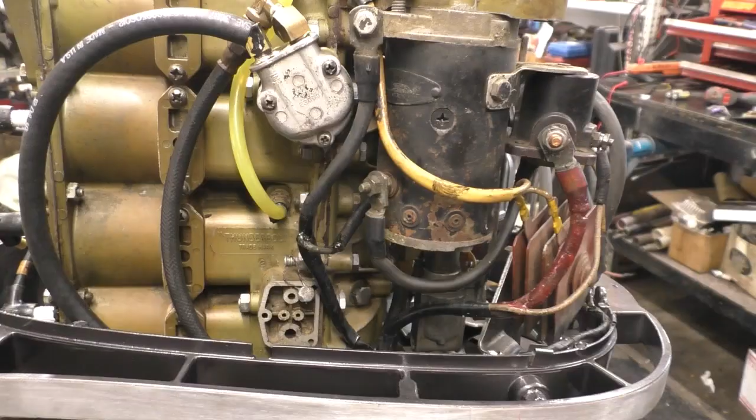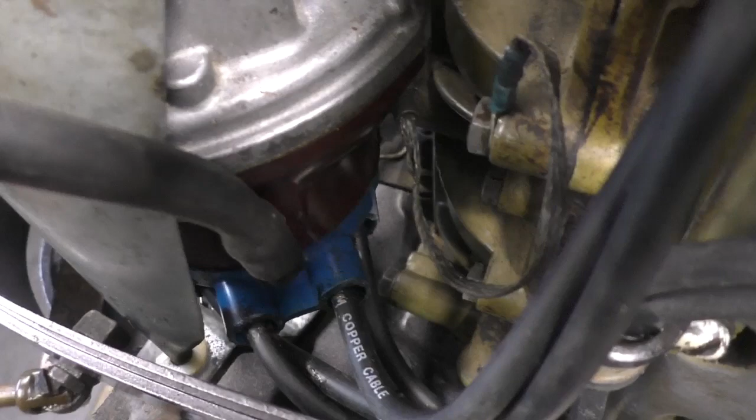Link and sync of an early Mark 55. This Mark 55 is the early series that had the connection on the throttle arm, and you have to adjust the timing last. You have to set the carburetor first, running in the tank with the tachometer and the test wheel. You got to have both.

This has got the choke solenoid, which is not mounted in the top shroud. Those were a little bit different, a little bit easier to set up. These older ones are a little bit more difficult.

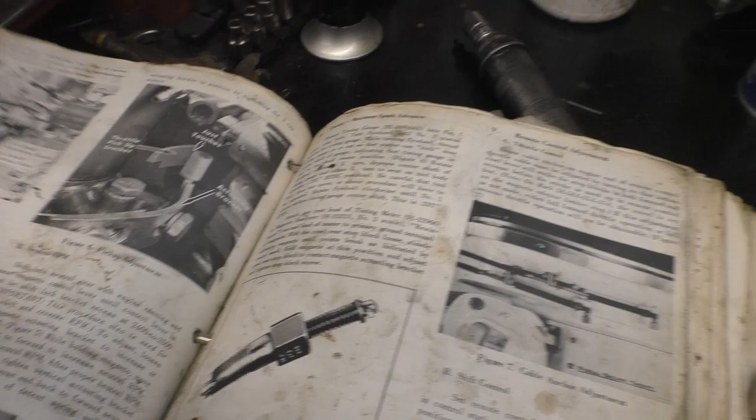This is the section in the book on it, 3 pages. Basically, you set up your magneto with the splines and so forth, and make sure your timing is correct on the flywheel, if you can find the marks.

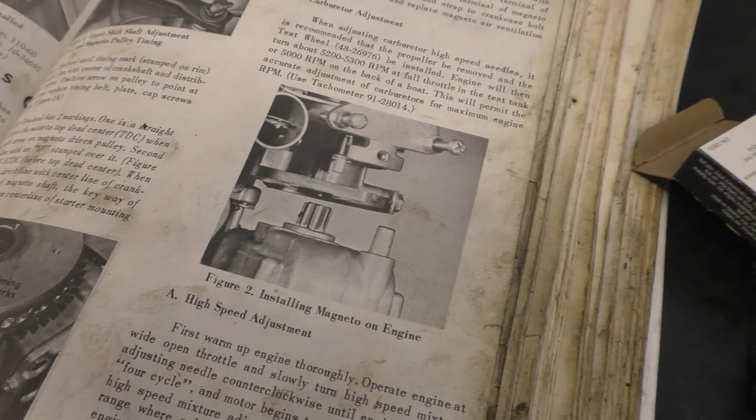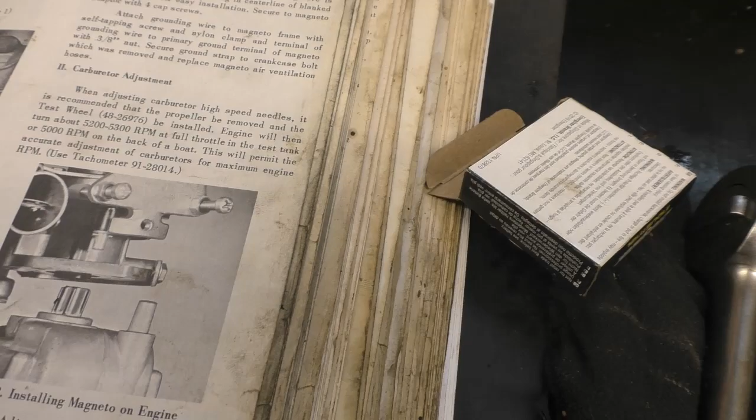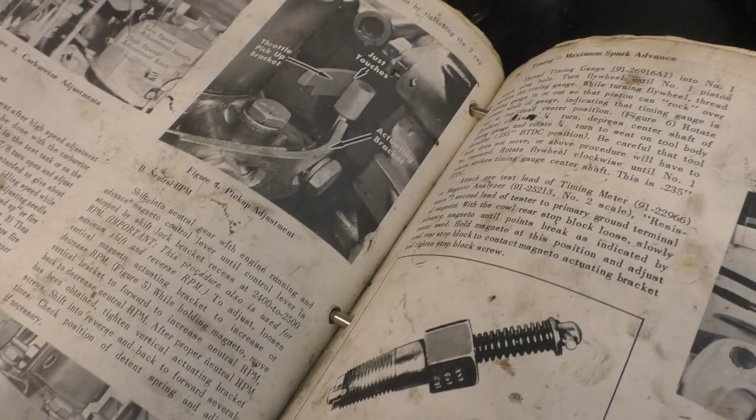The next thing you do is stick the thing in the tank and adjust the high-speed needle, both high-speed needles. Then you go to an idle adjustment, then a linkage adjustment, the pickup, then neutral RPM, and then timing, maximum spark advance.

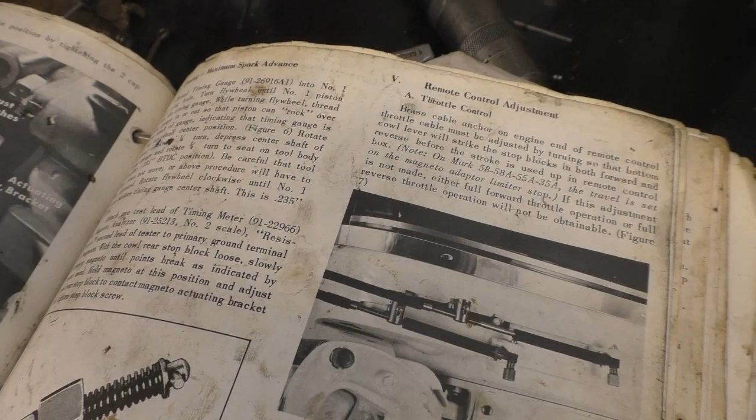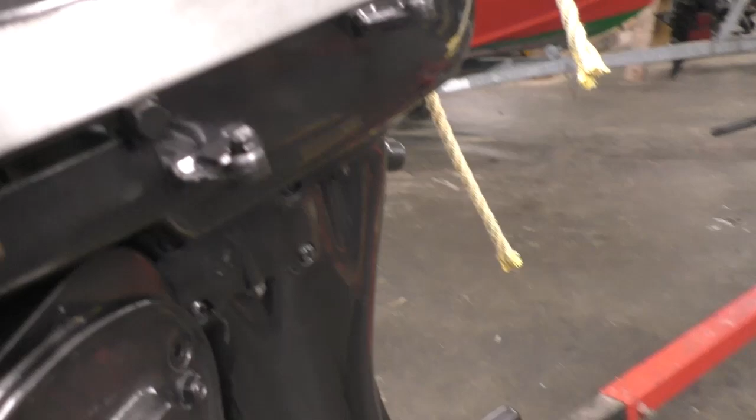So that timing is done after you've done everything else. Then your plate is set. This thing right here is set, and you adjust your maximum spark with these sliding locking things right here.

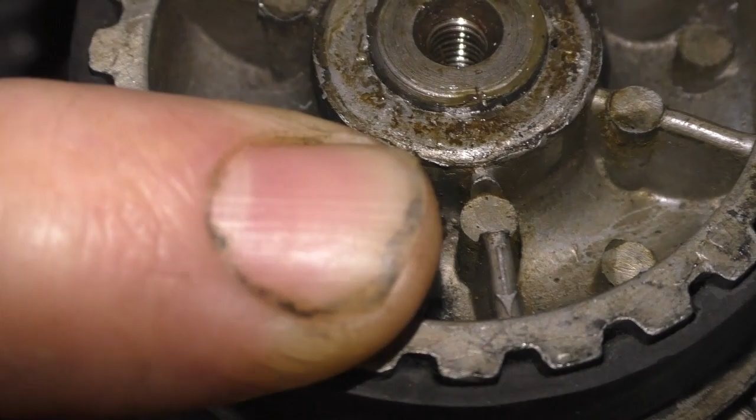Timing the Mark 55. The most important thing is the arrow on the distributor pulley. If you look very carefully, there's a little tiny arrow at the end of my finger, pointing, and we will rotate that.

This is the tachometer that was used to time these things. It's a Merc-O-Tronic, and you need this type of tach to get an accurate RPM on these things, because newer ones are way too sensitive, and the magneto puts out way too much juice. It's very hard to use a tiny tach or whatever, and these seem to work the best.

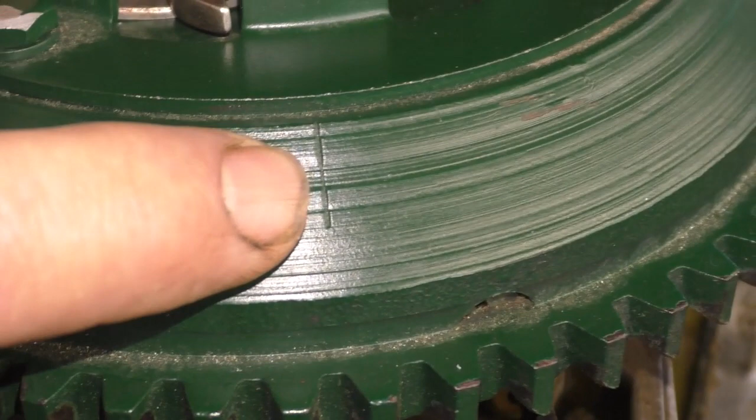The arrow, which we can see right there, is in alignment with the single line. There's another line over here with an O over it—that's the 235 line, and I'll show you how to line that up. But this is the line that aligns the pulley with the arrow, so the pulley is aligned properly with the #1 piston. We're at top dead center, and the magneto is in its proper relationship to that #1 piston.

We're going to be using the Mercury official manual, and Matt here is going to be asking me questions as we go along. The first thing we did on this was to set up the timing belt, so we had the straight line with no zero over it. It lines up with an arrow that's underneath this cover, and you can see it quite plainly.

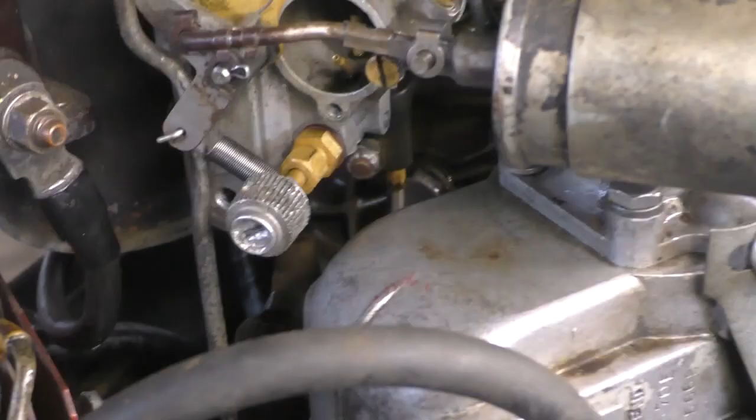The first thing we're going to do is have this running in the tank, and we're going to put a screwdriver in our high-speed adjusting needles. Listen carefully as I do it, and you'll hear the engine fade. When it starts to fade, you've gone past the point of the best fueling at wide open throttle, so we turn it backwards and give it more fuel for about 1/8 to 1/4 of a turn. Same thing with the bottom carburetor.

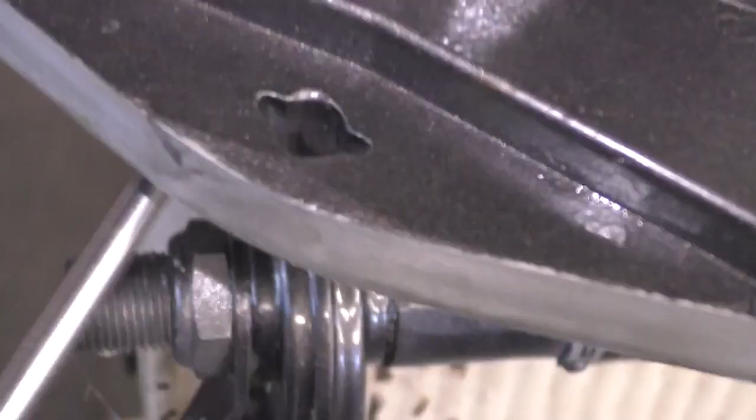You can see the screwdriver in there as well.

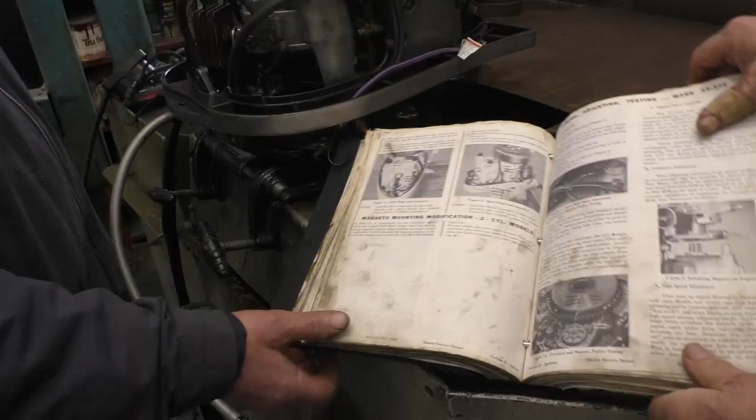Same thing. If you listen while I'm running the engine, that's the first thing we do in our timing procedure of this engine: adjust the high-speed needles. This is to adjust the carburetor high-speed needles.

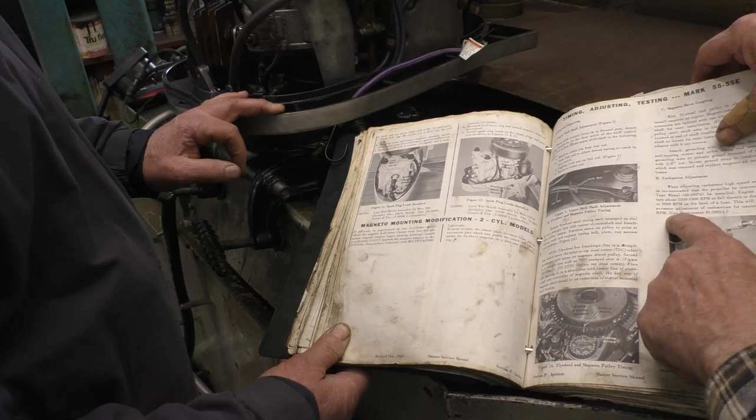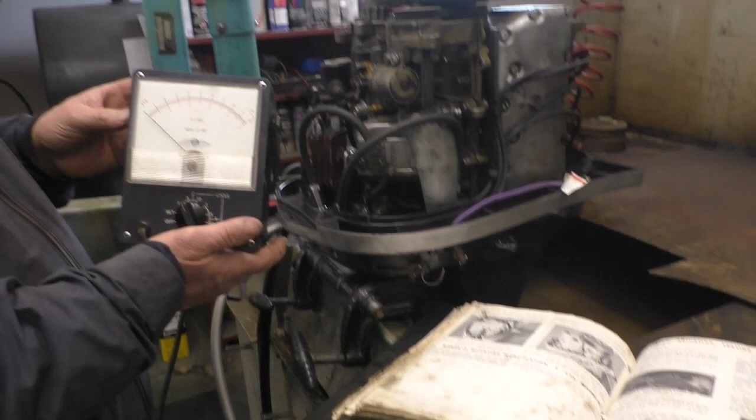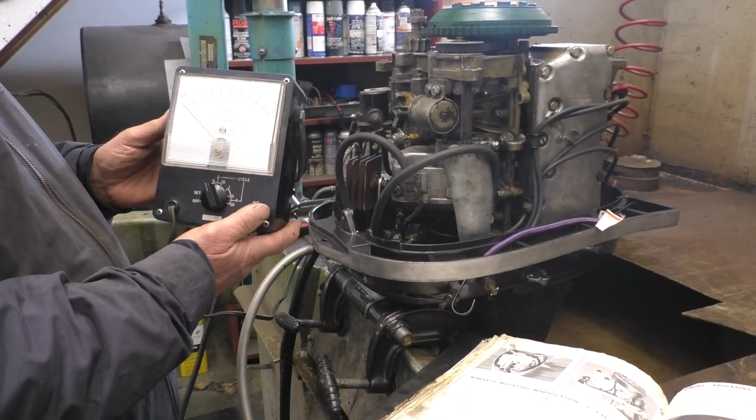You do need to use the tachometer, which we talked about earlier. This is a tachometer, an analog tachometer. Digital is not - it's not sensitive enough. The new digital tachometers pick up too much juice from the magneto, which tends to make them very erratic. So I really recommend using the old analog type tachometer on 2-cycle engines. That's what we'll be using today.

So the first thing we'll do is warm up the engine, and we will get that high-speed adjustment. So start it up.

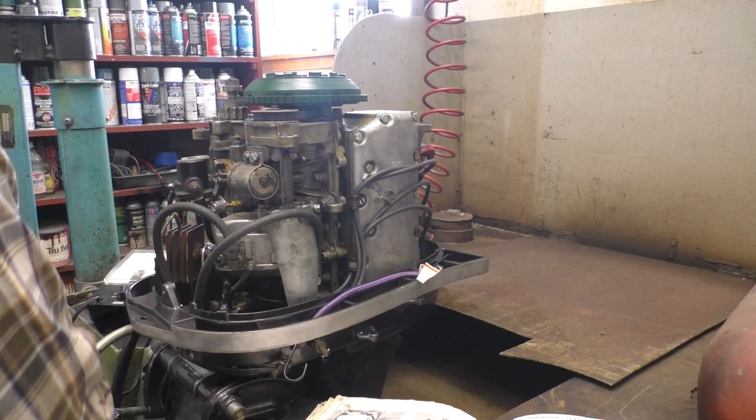In reality, this really shouldn't have a load on it when you're making those adjustments. Correct, it's got a test wheel on it - that's why it's on there.

We have not adjusted anything. So now, hold it.

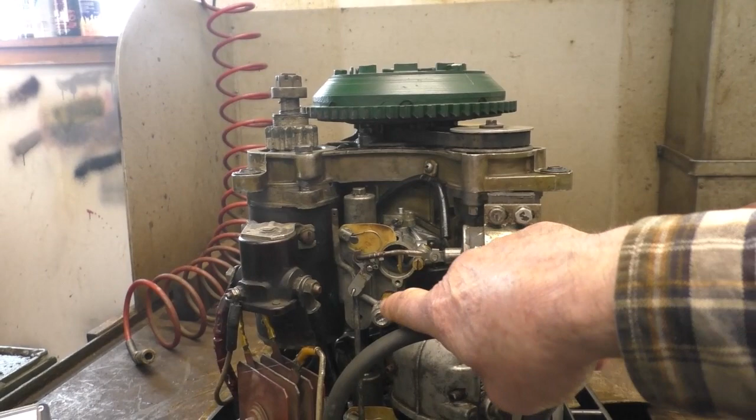Okay, we adjusted the high-speed needles. You heard the engine running. The needles are right where I was adjusting them - right here and right in there. Those are the two high-speed needles, and I adjusted them and went past the point where the engine was no longer running fast.

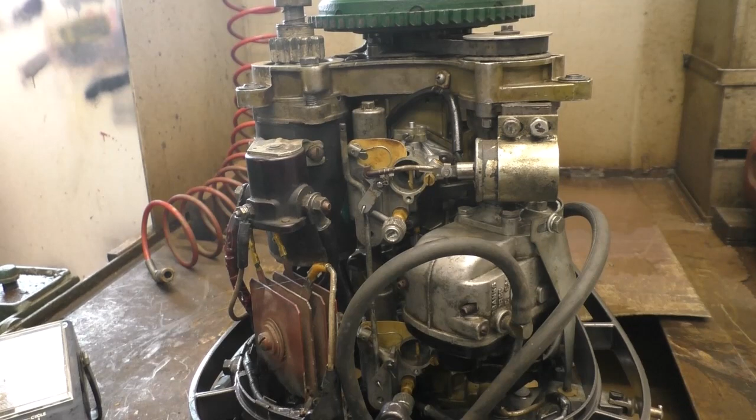It was leaning out, and you could hear it slow down very distinctly. Then I backed it back off to its highest place and went about 1/8 to 1/4 of a turn richer than that. It's better to be richer than lean on these, otherwise you'll pre-detonate a piston.

The next step, which you can hear us doing, is adjusting the low-speed needles, which you can see right there. Again, you do it the same way - lean it out, turn it in until it starts to fade, then open it back up. These are very sensitive needles, and you can notice a difference quite quickly. Same thing on the bottom one, which is right here, and you adjust that one as well. So that's the next step.

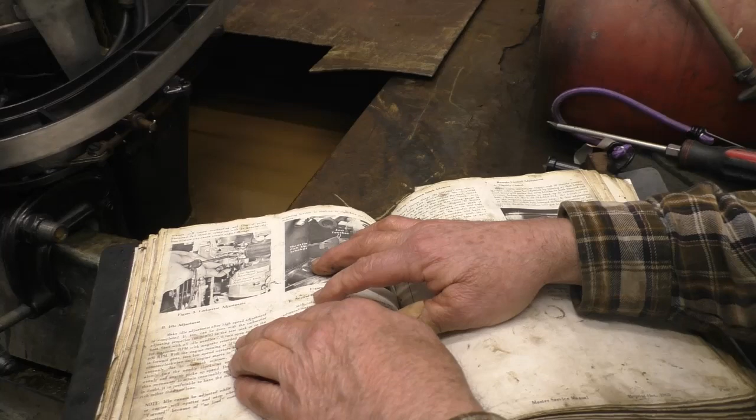Okay, so the next step in this book - this is Mercury's official manual - is idle adjustment. We're going to talk about idle adjustment. We're going to fire it up and drop it back and get it to give us about 600 RPM. We may or may not be able to achieve that because this engine's just been rebuilt, but we'll try.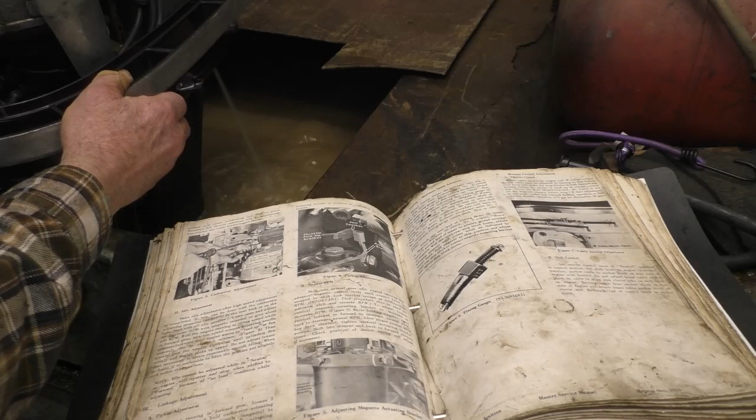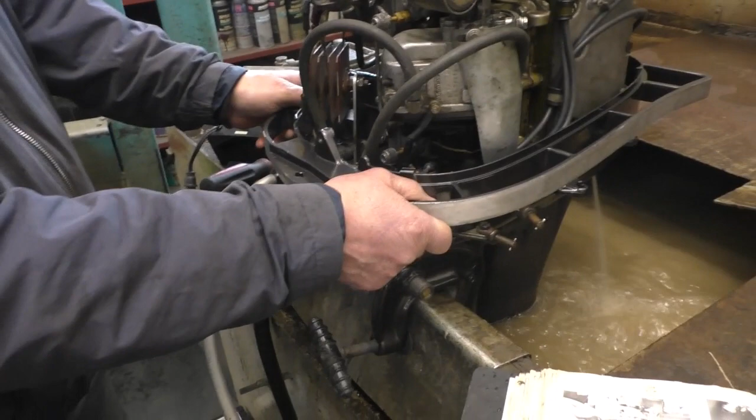Okay, to set this thing, we're going to adjust the stop. And the stop's right underneath here.

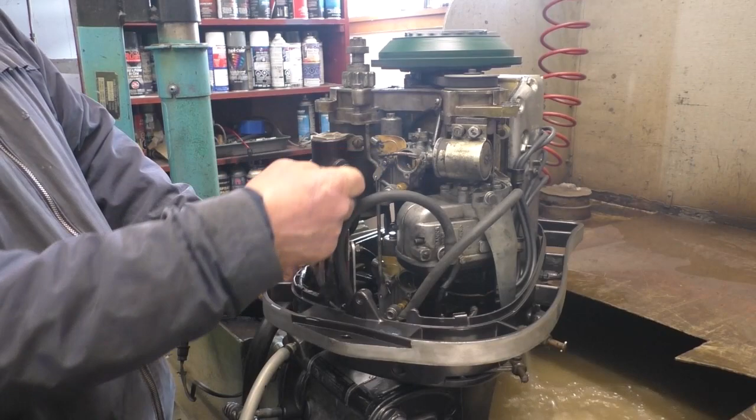Alright. Definitely slow down. Slow down - whoops, a little bit too much. And a quarter of a turn is like too much. Yeah, it really is. Okay.

Alright, shut her off and we'll read the next step here. Good, that's how we go. Okay, so we've done the idle speed adjustment. The next thing is the linkage adjustment.